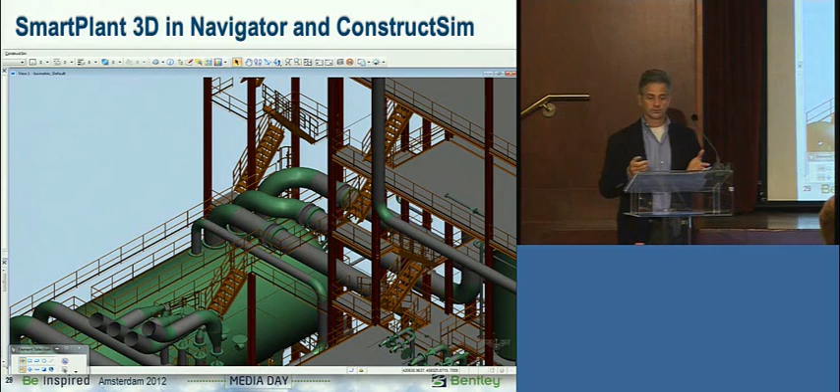So the idea of information mobility now extends to SmartPlant 3D data. We've got SmartPlant 3D data living inside Navigator and ConstructSim. We're going through extra effort to make sure that when we bring in SmartPlant 3D data, which is very data rich, we're able to bring it into a constructible model, which can then be brought into ConstructSim for work packaging at a construction work area level, a system level, or a crew level.

The beauty of this is ConstructSim reads an iModel, and we just needed to map to the database that lives inside SmartPlant 3D. We transform the database in, and all the graphics come in just by the fact that we're able to transform the SmartPlant 3D data to iModel.

Any questions about this? The users we've shown this to, especially in the plant and process world, are very excited. ConstructSim's picking up a lot of steam, as you'll hear in a few minutes, and this really enables users to have complete interoperability between engineering and construction when using the Intergraph SmartPlant product.

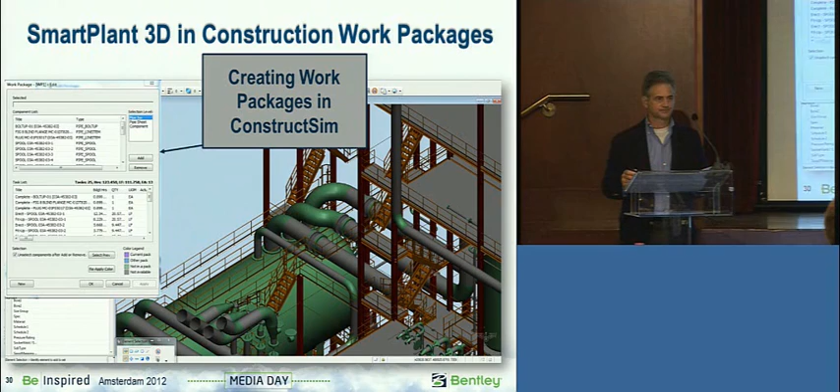As I said, we have SmartPlant 3D data running on the devices. Showing a Surface device, not running there just yet, but give us a little time. So that's iModel composition server and SmartPlant 3D. If there are no questions, I'll continue to move on.

This is Bentley Dynamic Rights Management Service, which we announced last year. It's getting ready to ship, so we wanted to tell you where we were. We did this service in conjunction with Adobe, who has a product called LiveCycle Server, used heavily in the government space, financial services, and healthcare—places where data needs to be very tightly secured—and we're bringing it to the EC market. We're licensing Adobe LiveCycle Server, putting it into the cloud on top of Azure, and we'll be able to secure data as it sits in a ProjectWise system. I'll take you through what that means in a second.

The primary premise here is that the data living inside these projects is some of the highest intellectual property you'll find. You certainly don't want this data getting into the wrong hands, and it's also very time sensitive.

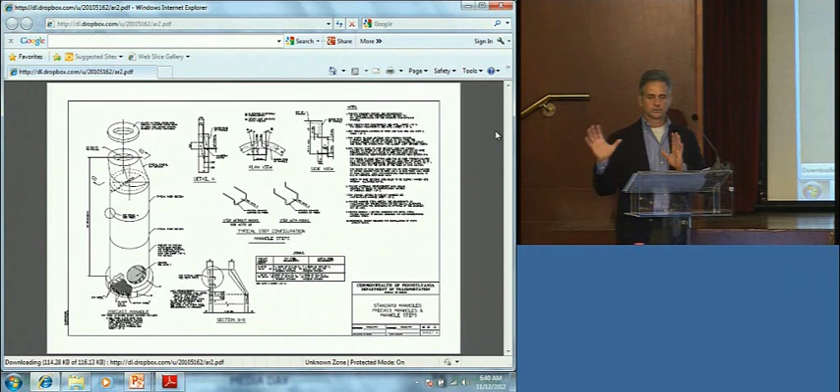Go ahead, click to go to the revised document—and as simple as that, there you go. The user is able to get the latest document. No more worrying about whether users have the right documents in the field. So that's one use case.

Do you want to go to the next one? Here we're just using stock Adobe Reader, so we have the software development kit from Adobe. Now in this case, this is a different one, right?

This right was an access right where you have to key in a username and a password. As long as you have the right username and password, you're able to come in, and then the server went ahead and watermarked the PDF in this case.

As many of you know, there are a lot of industry standards out there about how documents flow through a project. BS 1192 is one, and in many cases you'll be approved for ready-to-be-issued-for-construction, ready-to-be-issued-for-transmittal, or something of that nature, and there are all kinds of various work states. In this case, you can just watermark where it is in the approval cycle, so the user knows exactly what state the document's in.

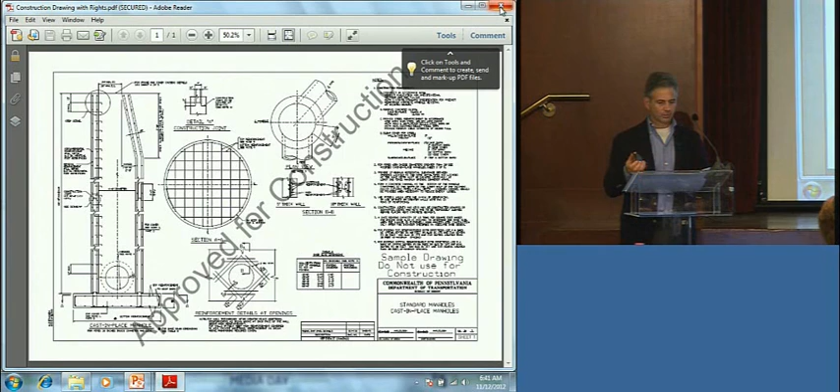Any questions about digital rights management? Okay, I hope this helps bring some of the products into some context for you.

That was the demo, and it worked.

Okay, the Trimble announcement. This was very interesting. Long story short, we've been working side by side with Trimble for 20 years, and users have been asking us to get together. We've done a lot of really good work behind the scenes with automated machine control for the civil industry, where we're able to take digital terrain models and get them down to Trimble devices sitting inside of tractors for doing land clearance.

But we really wanted to up-level the whole relationship. We actually went out to Colorado - Greg, myself, and a few others. We met with the CEO of Trimble and their key lieutenants, and we really did it on the back of a few use cases that our users have been telling us about. Larry's here to explain one of them in a minute.

But DPR was another, and we've had 3 or 4 others who have come to us and said, you're using your product and Trimble products together in the field - can you help us make these things much more seamless? So this was a very natural evolution of users coming to us and the willingness of the two vendors to get together. Let me take you through some of this, and Larry will definitely get you grounded in a really nice workflow he's beginning to put together.

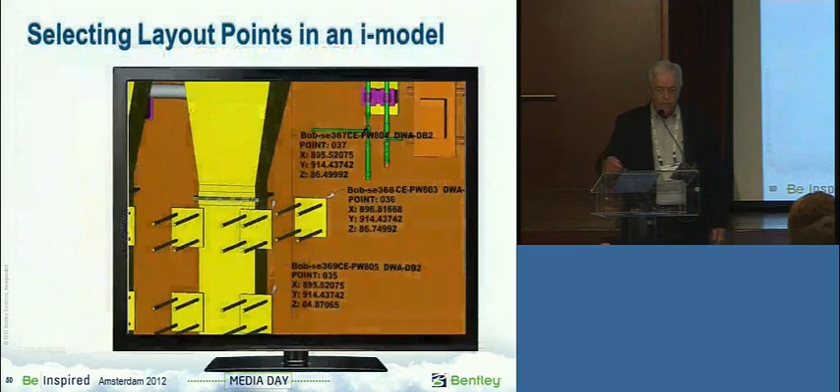And what I want to do today is explain to you how we got from that previous picture to precise 3D models of exactly what we have to build.

The BIM models. My first 3D model was in 1983. In 1985, a mentor of mine named John Stahl said one day these will be more important to construction and owners than anyone else. In '85, they were only important to engineering because we could extract isometrics, we were able to produce designs that were interference free, we could do rather primitive, but we could do constructability reviews, but we were really focused on engineering.

Today... that doesn't appear the way it does up there, that's good. Today...

3D models go through the entire life cycle. On the projects that have a 60-year design life, like the power plants that we're building right now, the solution providers will be working in and on these plants for the next 60 years. I'm sure DuPont has assets that they still use that come from 60 years ago, and they use laser scanning, they go collect data points and so forth.

What you're looking at is a 3D model of embedded plates that are going to be in the plant. The drawing that was produced to install these plates, believe it or not, provides the craft a dimension to nowhere. They really do. The plates are located by their center point, right?

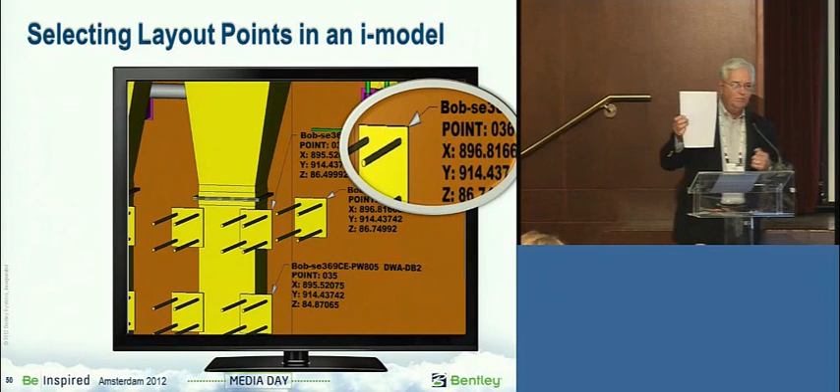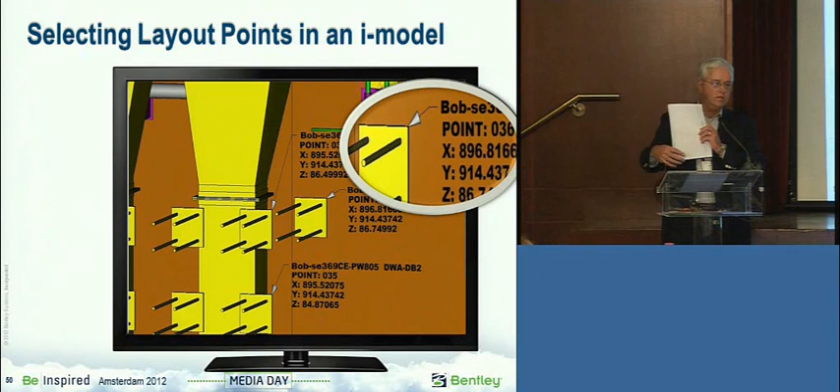Anyway, so that's what the craft have to do to locate this plate. In our 3D model, we have precisely known coordinates, X, Y, Z coordinates of each corner. We know every single point in the room. If you looked in this room and had to install that area right there as a plate with tape measures and plumb bobs, you would be there quite a while.

Or you would call a surveyor in, and he could deduce the information from the 3D model or from drawings and do some calculations and figure out with his instruments where it's supposed to go. Trimble now has technology where the surveyor is very important to get control of the room. In other words, think of it as GPS in this room, precise GPS control in this room.

And you would do that just by putting, does this have a laser pointer on it? I believe it does. Is it that? No. Never mind. But the precise control by survey is pretty easy.

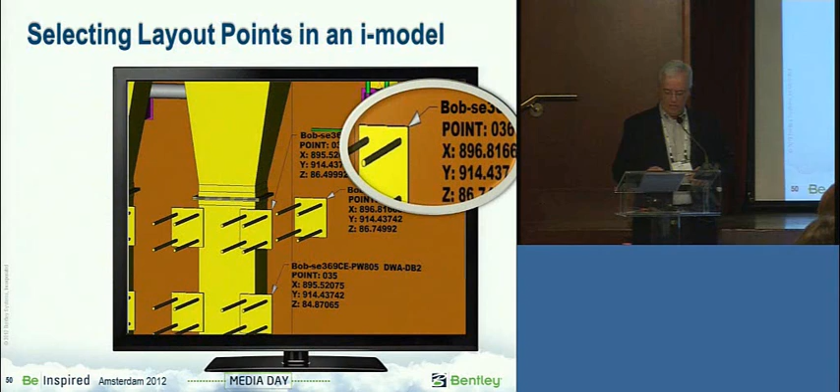And let me see, do we have the instrumentary? That's what I'm looking for. The devices, this is what I was looking for.

The drawings on the left and right, we extract information from the 3D model, and currently it's with human intervention. We have to select which point, because the number of data points in a 3D model is infinite. You only want to communicate with the device on precise points that enable you to place something exactly where it is. So this picture on the wall over here, we would only need 2 points of precision.

And the device on the right, this is what really has changed. The device on the right is a robotic measuring device. I don't want to call it a total station, it is a total station, but it's a robotic measuring device. Anyone in this room that would be a pipe fitter, an iron worker, or an electrician, not a surveyor, could come into this room, set the device up in a matter of minutes, and then be able to pinpoint and locate anything they needed to in this room from the information that had been extracted from the 3D model.

We use ProjectWise to control this information. When you think of it, we have 14,000 embedded plates, 22,000 pipe spools, hundreds of thousands of feet of cable tray and conduit, and the construction guy here is shaking his head - he knows exactly what I'm talking about.

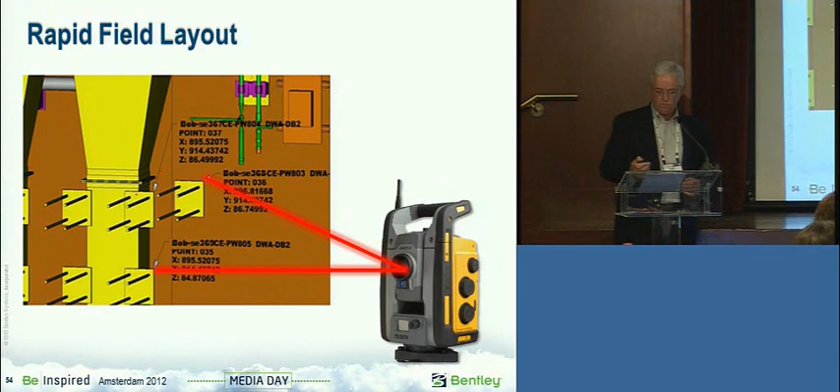I'm going to go through this quickly since I'm overrunning. The laser scanning at the end of the day will be the as-builting. We'll have the i-model and the laser scan, and we can superimpose the two together. At the same time, remember we have the XYZ coordinates of everything. Laser scans are actually millions of XYZ coordinates—points. Think of this room as polka-dotted at 1 millimeter separation. It's a text file with an XYZ coordinate for each point, and we control that level of information in tools like ProjectWise.

Point cloud streaming is essentially the same thing. I've explained that, and with that I'll say goodbye. Any questions? Yes.

For the guys on the construction side, what do they expect now from the technology? Our construction tolerances—the technology is much more sophisticated than what we require. We get down to the 2 millimeter range inside a room like this, which is less than a sixteenth of an inch.

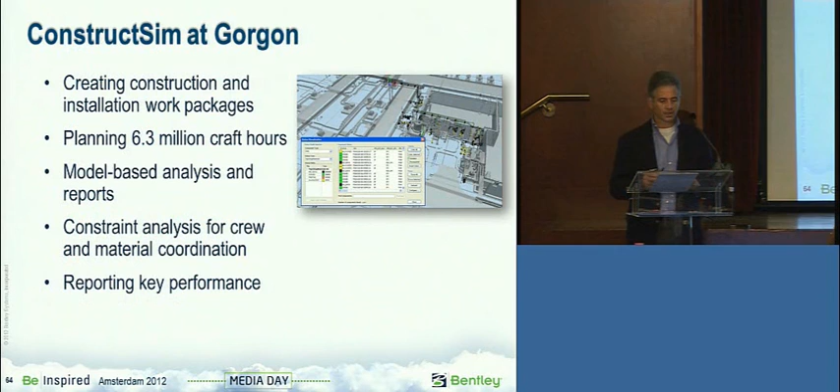They're also pre-assembling racks and units in China and Indonesia and shipping them to the site. So the whole idea of status visualization—knowing where your materials are, knowing where your prefabbed materials are—is really critical to having an on-time project. They're planning 6.3 million craft hours using ConstructSim. They're doing constraint analysis to understand crew and material coordination, and they're also doing all the reporting for key performance indicators.

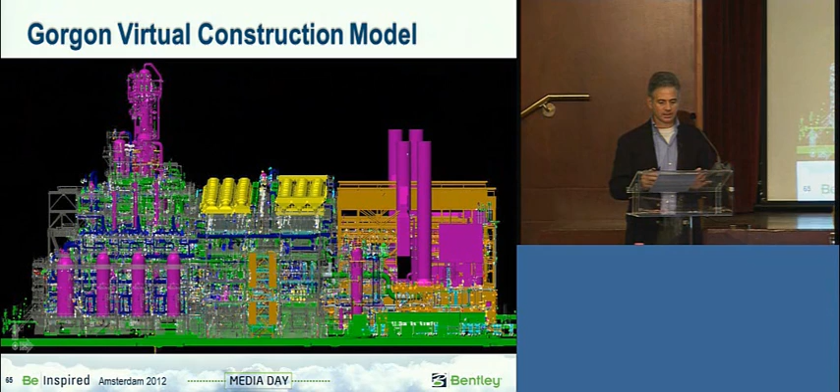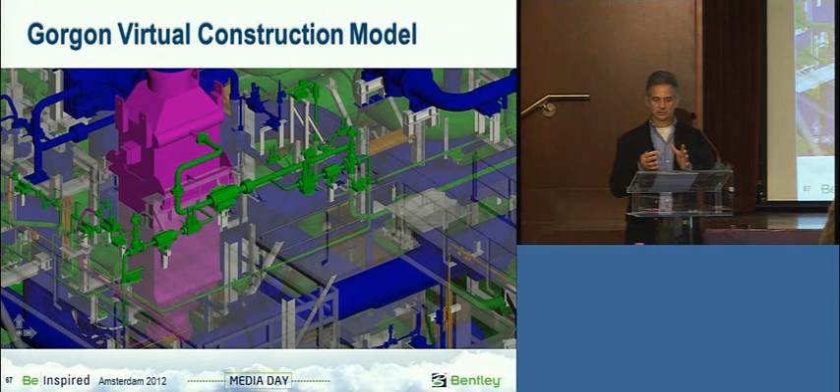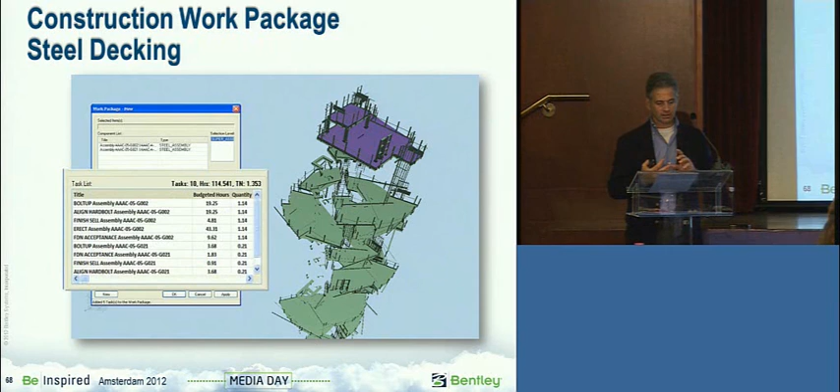Here's some of the models. You've seen other models—this is a massive model that was done, a constructible model. Behind this are all the details associated with the schedule, the materials, and all the crew planning. Sever is going to take you through how they do it at Technip, but this is another version. You go from this massive constructible model and begin to break it down by system. That's the beauty of this product, ConstructSim—it can read these large models and enable you to break it down to the system level. In fact, in this case you can break it down to the steel decking, and do work packages for steel decking, getting down to the bolt-up assembly, the finishing of assemblies, when erection needs to happen, etc. So it gets down to that level of detail. As Jim said before, the devil's in the details.

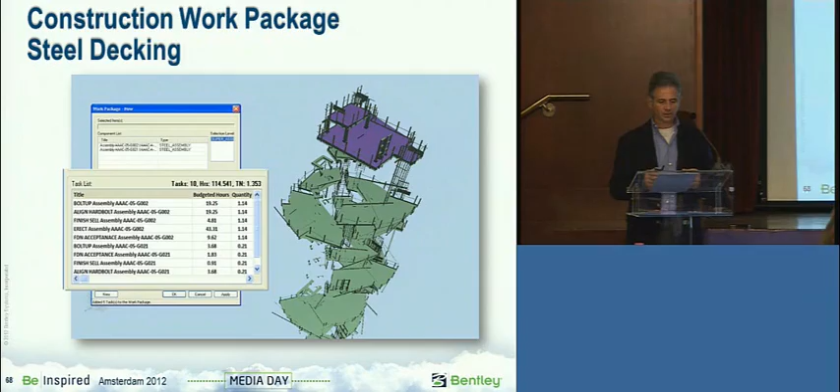It's when the small things go wrong that projects start to get into trouble and things start to compound. So it's not just about the big model; it's really about the detailed analysis.

So a couple things about our apps. We'll transition you from the construction pieces into the apps, and also answer questions along the way. Bhupinder took you through the app strategy and you saw the demos. Hopefully you'll get a chance to go out and get your hands on some of the apps and devices. There are a couple things we didn't cover, like the developer tools we're coming out with, and some of the characteristics of the apps.

There are really two points here. First, when we develop the apps we have certain design criteria we use for each one. First off, we want to make sure we're highlighting and extending our desktop and server products—all that great engineering information and managed information you're getting in ProjectWise and AssetWise—we'll extend that information out to the field through the apps.

The second is providing connections up to Bentley Connect, so we see that as a true synchronization point, across multiple platforms. What we're finding more and more is that users' IT organizations have a BYOD strategy—bring your own device—and we're seeing more and more of this, with organizations going back and forth.

One day it's 'I really like iOS,' then 'wait a minute, Windows RT just came out.' For us, we have a core platform technology for mobile devices now. Let the user decide which device they want to run on, because in six months there'll be another device. We're really trying to separate the device and the apps and keep the magic happening back on the server. Supporting disconnected use is paramount.